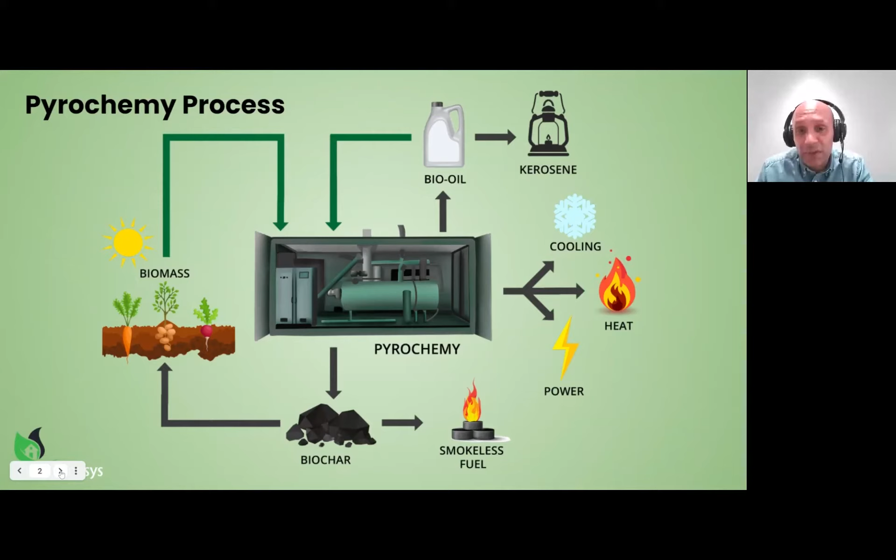Recommendations that came out of the LCA were that we need to develop a sustainability protocol. And this protocol would really tackle 3 key things. Make sure that when we're using biomass, it avoids competition with local use. As I said, we don't want to be taking away materials that other people are already using for something else. So avoiding competition, ensuring the sustainability of that feedstock, and then also how we look at using batteries as a low environmental impact for power distribution.

Now, there was a lot of knowledge transfer from University of Surrey to our team, so that we've now developed additional capabilities in-house, thanks to the great work that was done. And that means, using the LCA data collection methodology, we've got a way that in future we can do LCAs ourselves. And that will help us produce accurate and appropriate LCAs, using the feedstock and the location data that we gather.

Now, the other important thing, as I mentioned earlier, and this is where June was going to talk a bit more, is about how we can look at integrating hydrogen production into our PyroChemy process. And that's really important when coming to upgrading the bio-oil. Okay, but you'll hear more about that later.

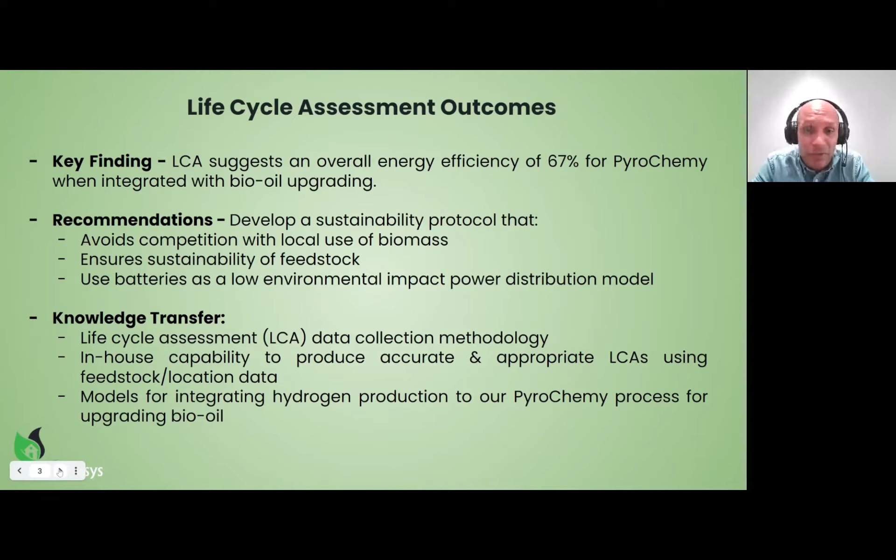So, geospatial analysis. We need to know where people are, and then we need to know how they're spread and distributed, and we need to know the proximity of settlements to major production of biomass. So that's really what we used geospatial analysis to do.

Just to tell you, 2 minutes left, Simon.

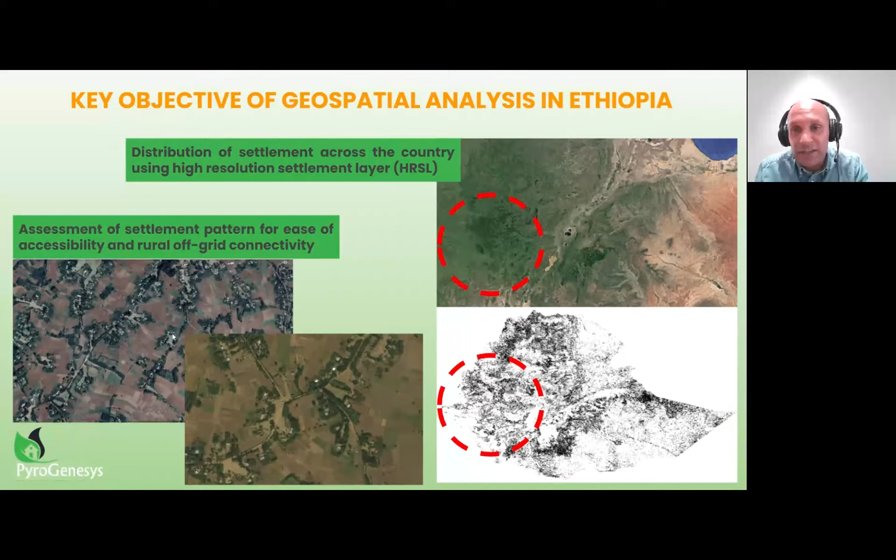Okay, so this is what happened when I was mentioning that we could then compare the settlement dispersion, which is a very different model to Nigeria. And then, of course, for the battery rental market, we needed to get an idea of how far these batteries can travel, and so how effective it is as a method for power distribution compared with a mini-grid model. And then of course, we wanted to know the size of the populations at those locations so that we could see, is it going to be commercially viable? If there's only 2,000 people, probably not. If there's 30,000 in a location that have electricity, probably a very good case.

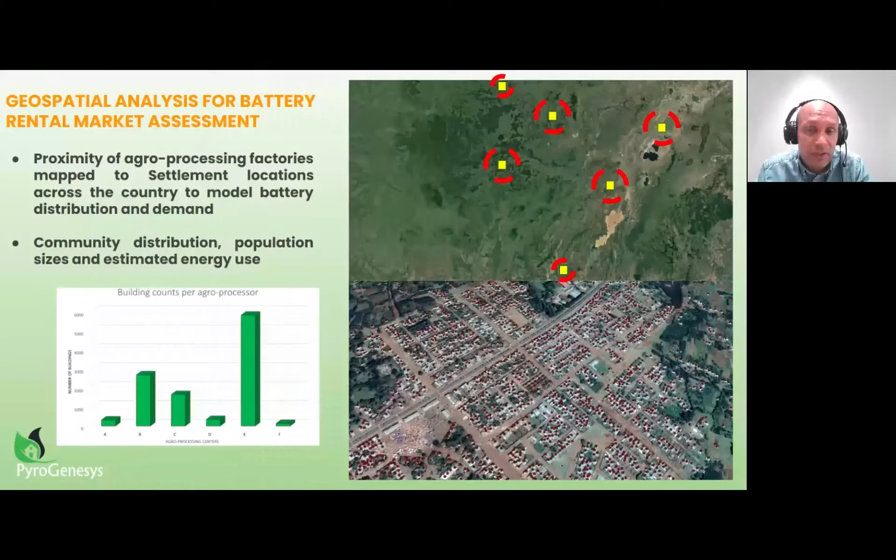Right. The other thing that, of course, we wanted to take into account is gender equality and social inclusion. Now, promoting technical training and understanding how women engage with our model is very important, especially when it comes to looking at how we're going to recruit, because we're going to do a lot of local recruitment. And we did some work that informed the recruitment process as well.

And, sorry, I'm trying to make sure.

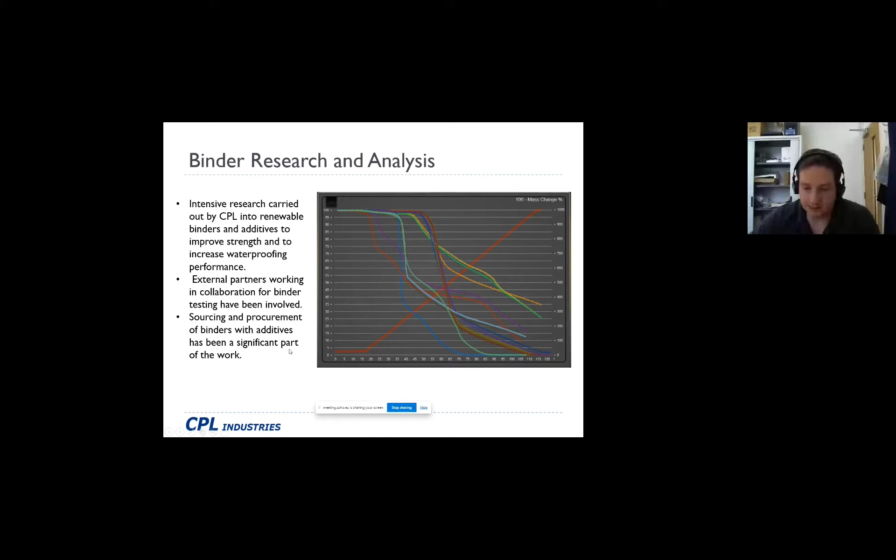One of the reasons for that is, in an industrial market, they want the briquette to remain a briquette right up until around 1,000 degrees for their specific application. We've also been taking a lot of time procuring these binders and additives, and that has actually taken up a significant amount of the project time.

So if we go to the lab scale testing, this is the hand press trials. Here you can see some examples of what we've done. So we've taken 50% biomass, in this case you can see olive, pistachio and macadamia, and mixed it with a 50% R&D blend, which is different types of coals. This can be petcoke, anthracite, and a specific additive in this case as well.

You can see how the additive has increased all the biomass's crush strengths in the briquettes, a good about 20 to 30% on the olive and pistachio, a little bit less on the macadamia, but it still shows an improvement. The control is just molasses. So the control also is not biomass, there's no biomass in that, it's all coal.

And the trouble with biomass is when you're forming a briquette, it's much more difficult to form the briquette compared to when you're just using coal. So that's why we've been searching high and low for other binders that can increase the strength of all the different shapes and sizes of briquettes we actually make.

So once we've done the hand press trials, we then move on to a pilot scale roll press machine. I'll just move on to the next slide actually. I'll go back to the Pyrogenesys binder, but on this one we use a large roll press which can take between 50 and 100 kilograms of material, whereas the hand press uses around 1 kilogram of material, so it's quite a big upscale.

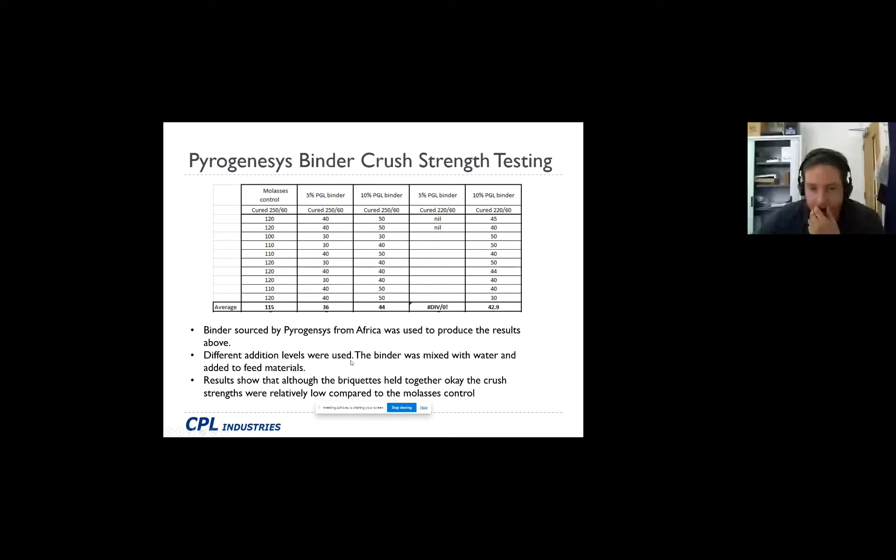So this binder was mixed with water, and you can see, unfortunately, in this case, the crush strengths were considerably lower than the molasses control. But we are still trying to find ways to improve that, and we could try different ratios of binder mixed in with this binder provided by Pyrogenesys.

So once the briquettes are produced, the final test we normally go through before emissions testing is the fire tests. So we load the fire as by the ASTM standard. We load the fire 3 times, and here we're looking for peak temperature or heat output, and also duration of the fire. So ideally, you want a very high temperature, but you want the fuel to last. You don't want to have to be reloading the fire every 10 minutes, for example.

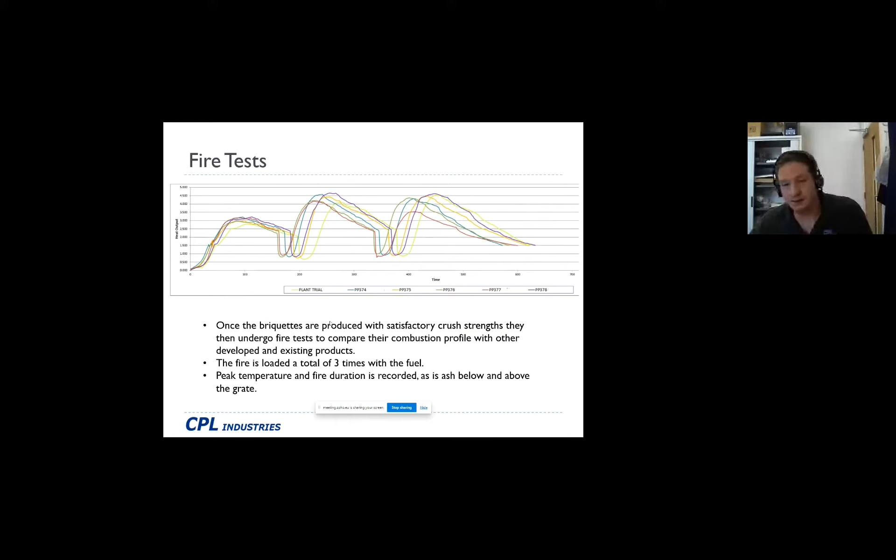So we normally compare our new product development against existing products that are in the market, whether that's our own or competitors. We're also looking here at what we call the SJ number, which is how much ash is remaining on top of the grate of the fire. That's also very important, because the customer doesn't want to see just a pile of ash and some unburnt carbon left on the grate, which is then a waste. So we look for a very low SJ number during the fires. And I think that covers the CPL work.

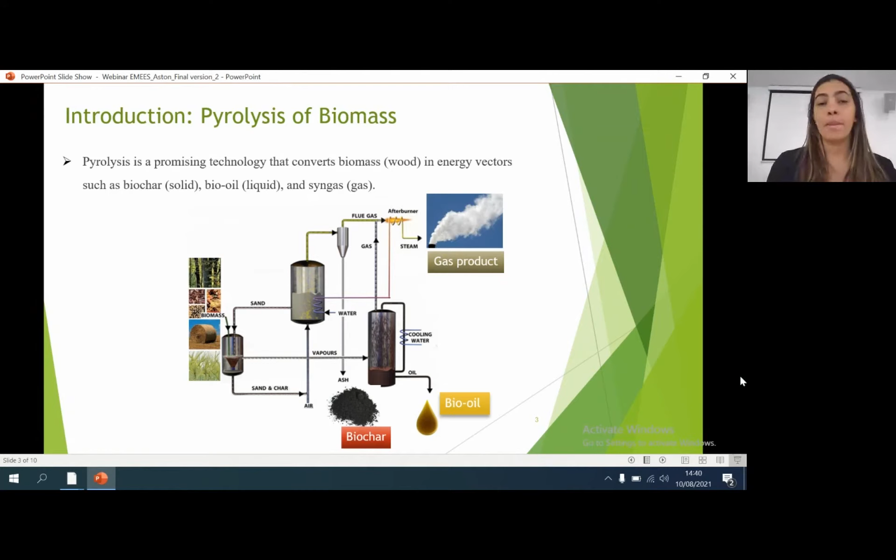The main focus in this presentation will be the bio-oil, and depending on the configuration and conditions of this pyrolysis process, it can be classified as fast pyrolysis, intermediate pyrolysis, slow pyrolysis, as well as gasification process.

Fast pyrolysis is performed at temperatures around 500 degrees Celsius with short residence time. The main product in this configuration is liquid, around 75% liquid in one phase.

In contrast, the intermediate pyrolysis process, carried out at temperatures around 500 degrees Celsius as well but with longer residence times, results in two phases of liquid products: an aqueous phase and an organic phase that we call bio-oil.

For other configurations, such as slow pyrolysis, it's possible to produce high yields of char, as for example in the slow pyrolysis torrefaction mode, or slow pyrolysis where we promote carbonisation, it's possible to have a very balanced yield of liquid, solid, and gas. In the gasification process, the main product is gas.

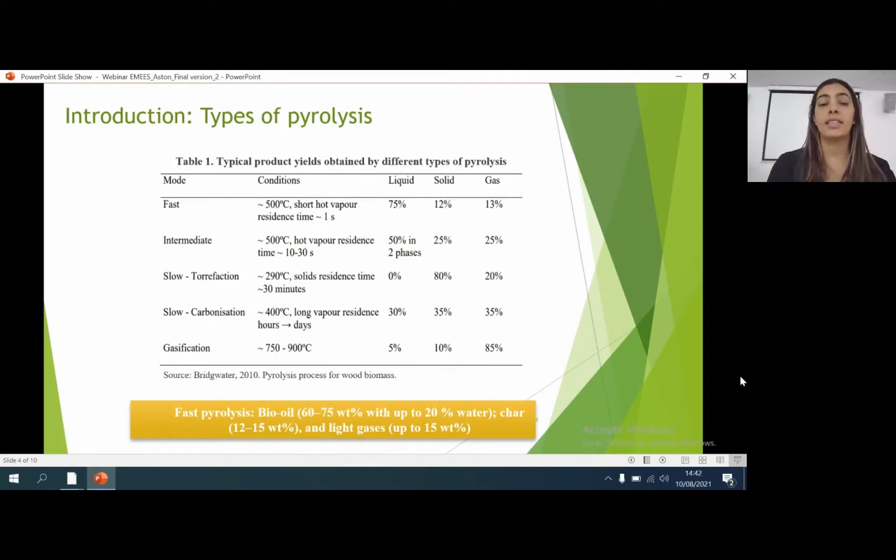From this table, clearly the best option to produce bio-oil is the fast pyrolysis process, which gives a yield of bio-oil around 60% to 75%, with up to 20% water in one phase only, and less char formation and less gas formation as well.

These oxygenated compounds result in several properties that make the bio-oil present poor combustion performance. For example, the bio-oil presents high viscosity, and the presence of carboxylic acids results in a bio-oil with high acidity and corrosiveness as well.

Due to the high oxygenated content, the bio-oil presents a low heating value compared with gasoline, for example. It also shows low volatility and low thermal stability, which makes the bio-oil tend to polymerize during long periods of storage.

Furthermore, bio-oil is immiscible with fossil fuels, and because of all these characteristics and properties, the bio-oil shows poor combustion performance. That's why an upgrading process is needed before it can be used as a biofuel with suitable combustion properties.

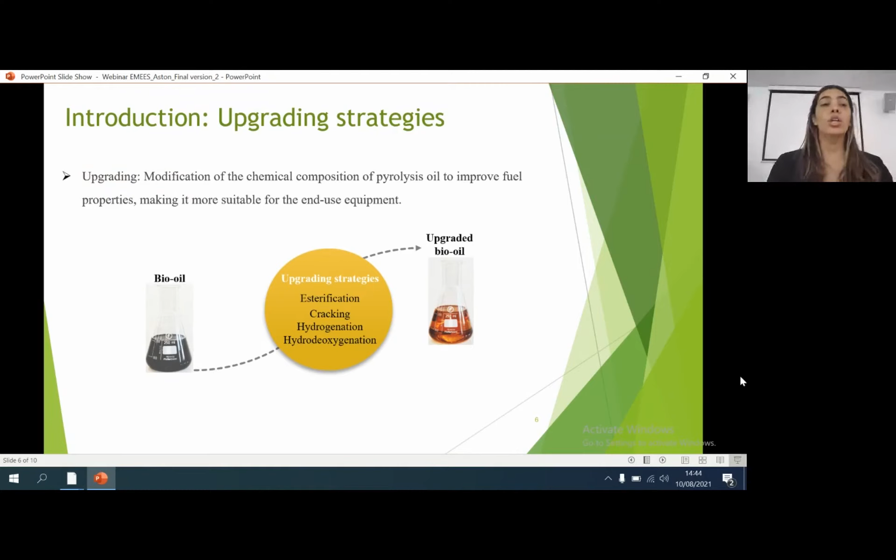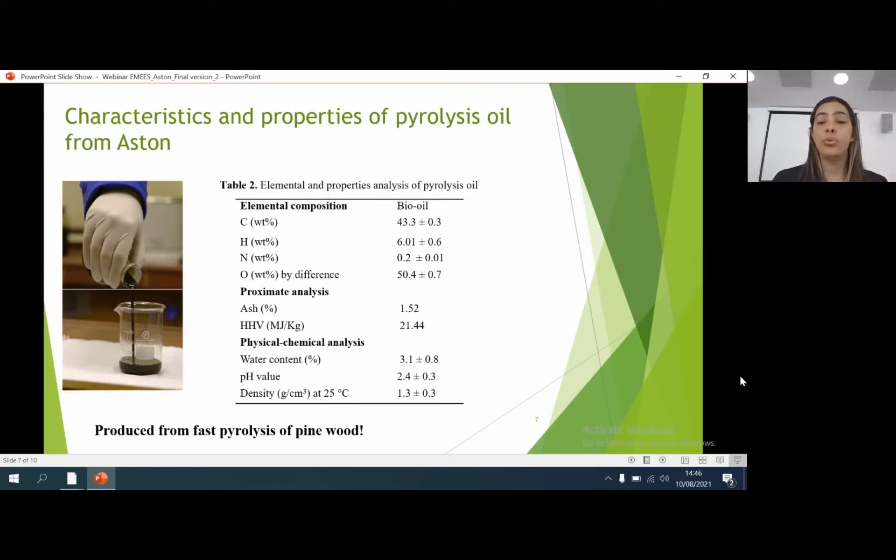So as you can see, this bio-oil presents a low heating value, around 21 megajoules per kilo, and also a low water content. The low water content is quite important because water can deactivate the catalyst during the upgrading process and also decrease the biofuel yield. So as you can see, the properties of this bio-oil imply several characteristics that give it a poor combustion performance, and that's why we need to upgrade this bio-oil.

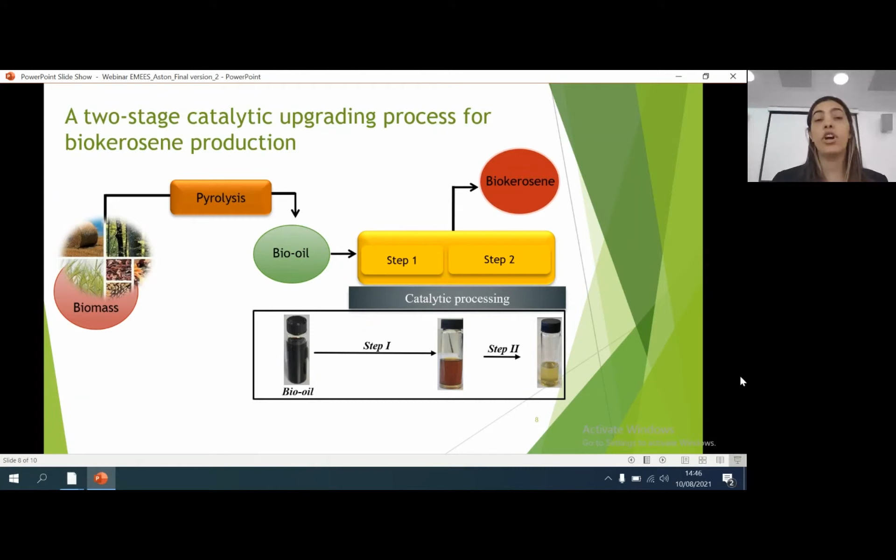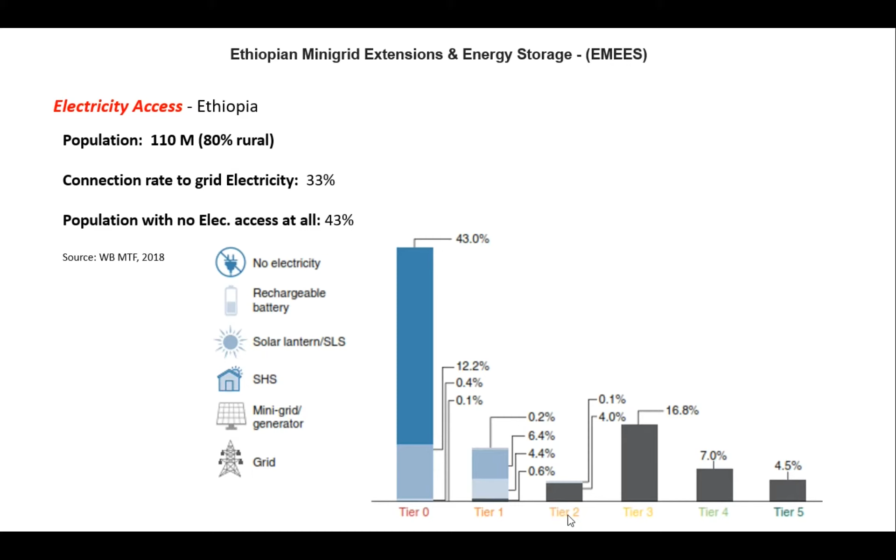Solar irradiance, we are closer to the equator, and we sometimes boast of having 13 months of sunshine, and the 13th month is only 5 days though. So the average irradiance level is 5.5 kilowatt hours per meter squared, and we also have good wind resource.

But when you see the biomass resource, particularly agricultural waste, we do have really quite abundant resources, though we are not using them very efficiently. It's only less than half of that we currently use, and those that we are using, we use traditional conversion technologies like cook stoves, the efficiency of which is very, very low.

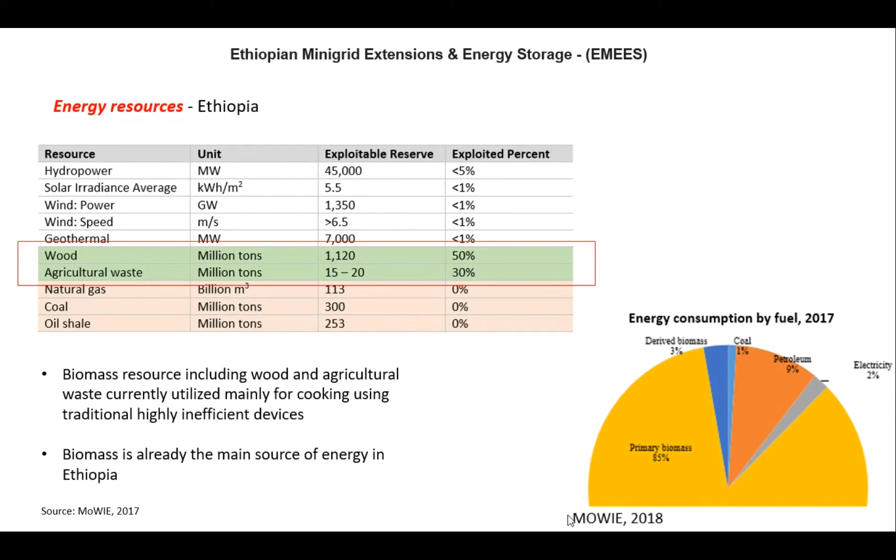So the pyrolysis technology would actually help us use it for power and heat at higher values. So in the case study, this is the area where we have our mini grids. Basically, our mini grids are powered by wind and solar hybrid, and they're battery based as well. This area is located in the central highlands of Ethiopia.

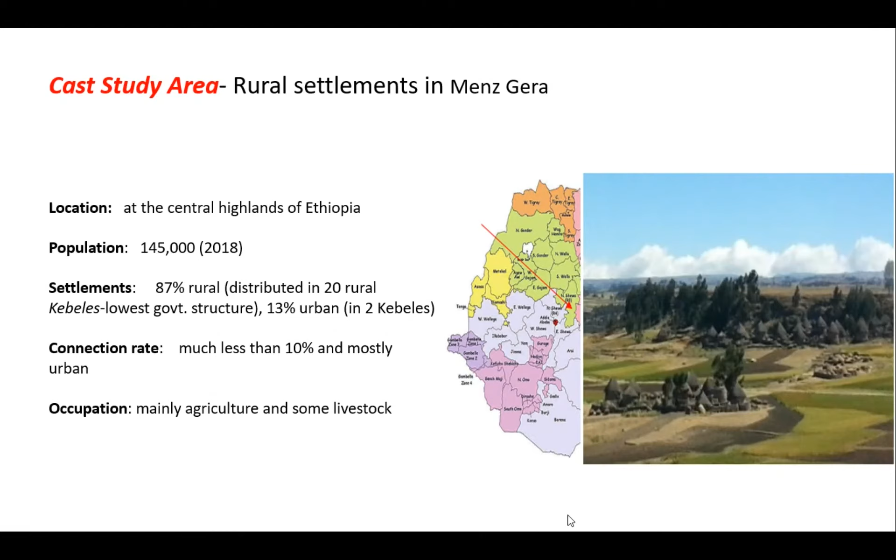Or in some areas, for example, the village that we electrified, they don't have any connection at all, except that a few of the households already adopted solar lanterns, and very few of them solar home systems. The main occupation in these areas is agriculture, and they also have some livestock. So this is a little bit of background on the villages that we have in mind when we think of mini grids, extension of mini grid services, and providing energy access.

You can see the kind of villages that we have there. And the picture at the bottom is the distribution line for our mini grid. So currently, as Simon initially stated, unlike Nigeria, we do have clustered but scattered households. So we have 6 mini grids, microgrids I would rather say, but the intention is, as the demand grows, we'll connect at least 4 of them together, because they are close to each other.

But at this moment, connecting them is rather not economically viable. But when the demand increases, then that's the plan that we have. Through our mini grids, we've already connected from 250 to 300 households, and they are actually enjoying the better lighting service and mobile phone charging.

But for productive use to come, a number of things need to work together. But there are already a few things on the ground. There is one diesel engine powered grain mill, and also a government-owned generator that drives the water pump, which is not currently functional. So we are trying to extend our services to these systems, but technology is also one thing, particularly when it comes to the grain mill, the technology that is appropriate for mini grids.

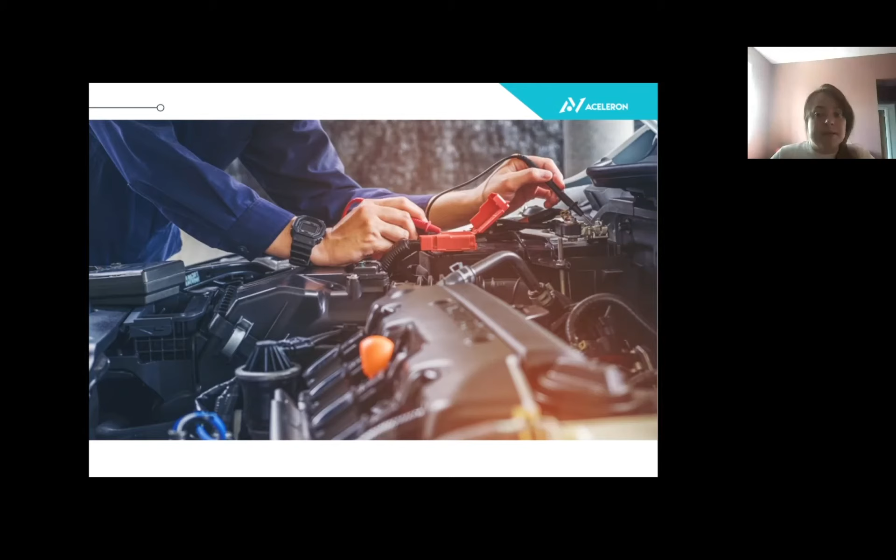Batteries are made up of hundreds of subcomponents, and typically it's just one or two of these that would have gone bad at the end of the battery's life. But because of how they are designed, we have to throw the entire thing away, which generates a lot of unnecessary waste of valuable assets, which obviously has a terrible environmental impact.

And just to give you an idea of some of the numbers around this, by 2040, from electric vehicles alone, not considering all the other batteries that are going to be all over the world by this point, there is an expected 22 million cubic meters per year of waste from electric vehicle batteries. And to help you visualize that, there's a nice little infographic here. That waste per year would fill the Melbourne Cricket Ground 14 times.

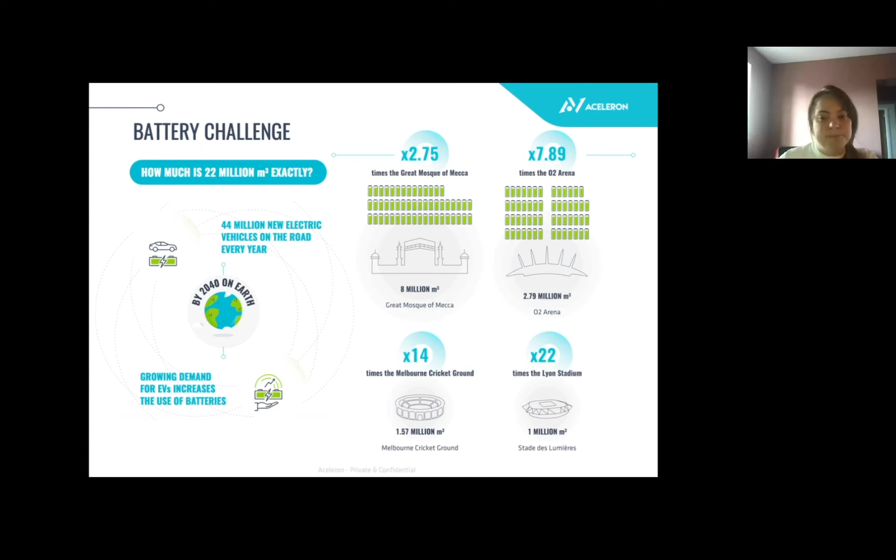So as you can see, this is really something we need to get a handle on now and ensure that we're doing something about this before it gets to be too much of a problem. So this is where Aceleron comes in. We have designed our batteries differently to typical lithium batteries.

In the usual method of putting these batteries together, all the parts are put together using glues and welds as well. And it makes it impossible to service, really. So that's the need for throwing the entire thing away.

So our design uses a compression technology, which allows us to, if there is an issue with any of the parts inside, after however many years, open it up. Using our predictive maintenance and also testing of batteries afterwards as well, we can figure out which parts have something wrong, replace them, and then put that battery back out onto the field.

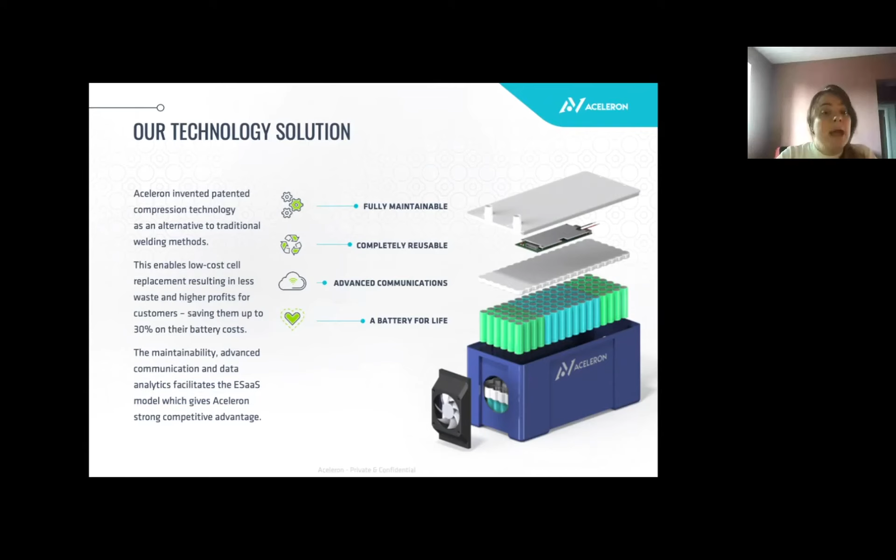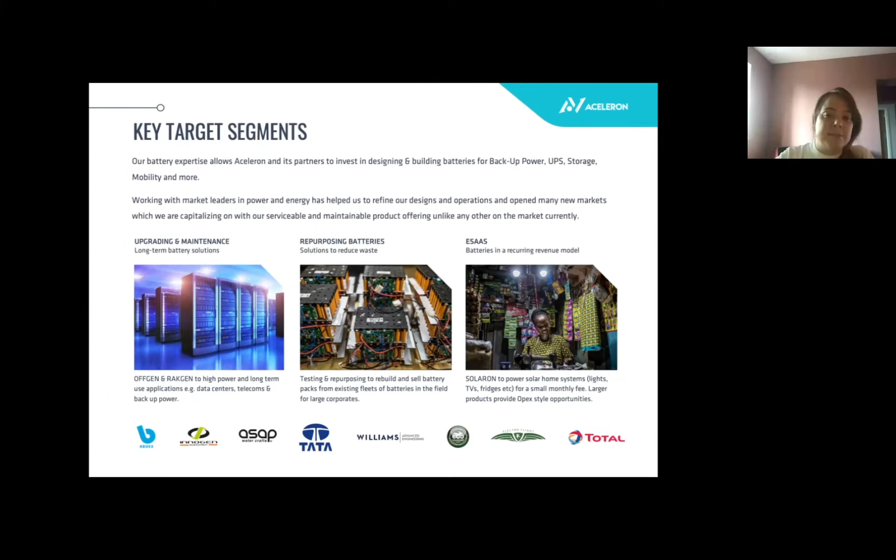So I would just like to tell you a few things about the different areas we currently work in. Some of the partners we've worked with currently and previously are down the bottom of the screen there. And really they all see the value in the serviceability and maintenance of the batteries, which is going to allow us to reduce that waste in the future.

So we work right up from home energy storage in places like the UK and the Caribbean. This year we're bringing out a large rack-mounted energy storage, which will allow us to facilitate commercial storage. And then we also go right down to much smaller devices, which just allow the combination of solar to be used in quite a lot of African homes, potentially for lighting or TV. Predominantly we work in Kenya and we have a facility there, and we're looking to expand into other countries, which this project has helped us do as well.

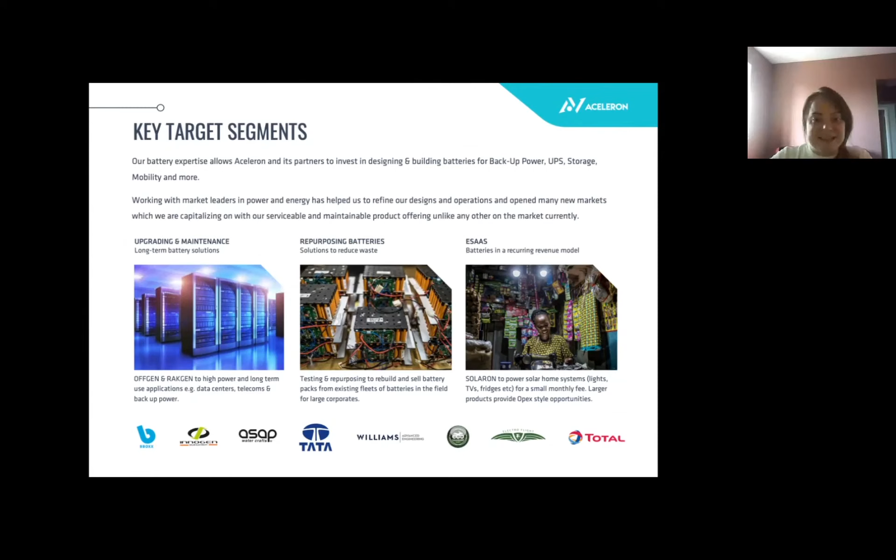So what we do in Kenya specifically is we work at the waste centre there, where we are able to collect and sort battery cells that have come from other technologies, which have those non-serviceable packs. If it wasn't for our technology, these would all just go to recycling instead. So we're able to take the Kenyan waste from across the country and repurpose it into batteries.

To do this, we disassemble the batteries. We then test the cells quite rigorously to ensure that they are safe to be reused. And then those cells are sorted, and using algorithms, we understand how those batteries can be best placed together into a battery pack to enable them to be put into use.

And so it's these batteries that we've been using and providing Halawi in Ethiopia to assess how we can expand his mini grid availability to more rural customers.

So I'll just say a very quick word about the differences between specifically our lithium batteries and lead acid, because typically in mini grids and in quite a lot of other applications, lead acid is sort of the incumbent technology. The way we have produced our lithium batteries is that they should be a similar voltage and capacity so that they can be used in similar scenarios. However, there are some great benefits to them.

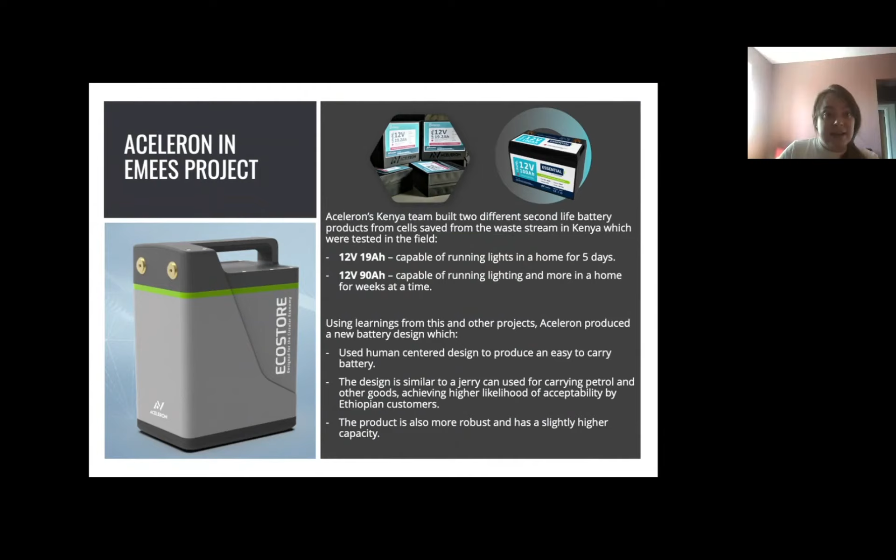So finally, we're going to go back to the presentation from the University of Surrey and Dr. Mary. Mary, are you going to try presenting it yourself? I'm going to share my screen, Bernie. You're going to share your screen, right. I think it's going to be easier to do it this way. Hold on a second. Sorry about the failed attempt last time. The system doesn't seem to like the PowerPoint presentation that I have, but we'll take it from Simon's computer screen. Okay, is that working now? Can everybody see that? Yes, we can.

Thanks. So, as I was saying, we have all heard in the last couple of days more than ever how the climate emergency is affecting the globe. And for a number of years now, biomass for bioenergies have been promoted as a means of reducing greenhouse gas emissions, reducing dependency on fossil fuel, but also to add value to agriculture and horticulture and forestry systems.

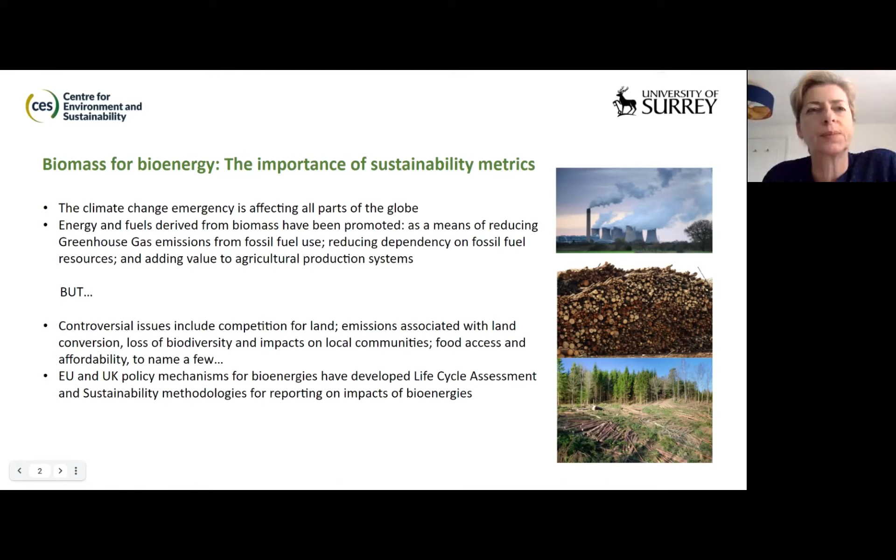Next slide, please. Sorry. Yeah, here we go.

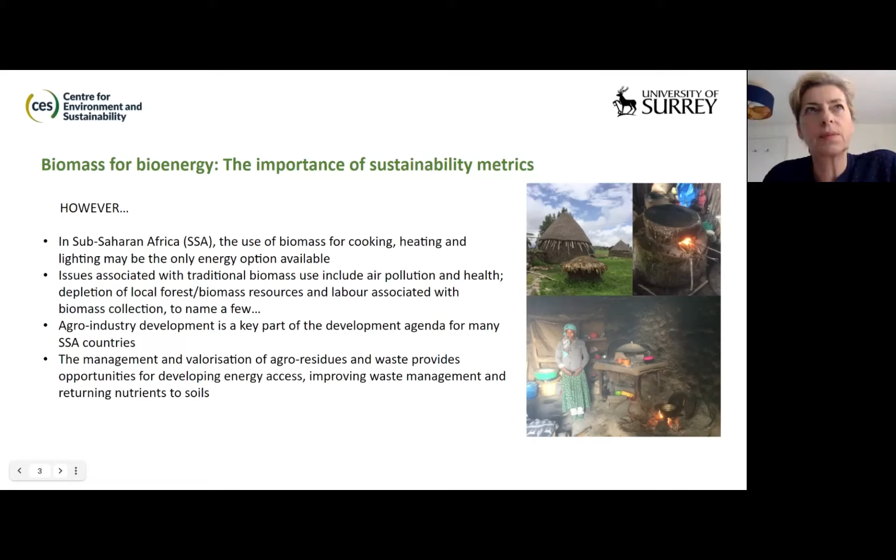Okay, thank you. So we've heard quite a lot about the EMEES proposal already, but just as a recap, it's a bioconversion technology which will provide 3 potential energy outcomes. And as part of the proposal, we've also looked at the mini-grid extension service offered by the Aceleron technology for repurposed batteries.

Some of this work relating to the biomass availability is related to a previous project which Ethio Resources and University of Surrey were involved in, a project called AgriSen, which looked at how the agricultural industry can be in some ways a sort of central point for energy provision. And as part of that, agro-processing residues and wastes were considered.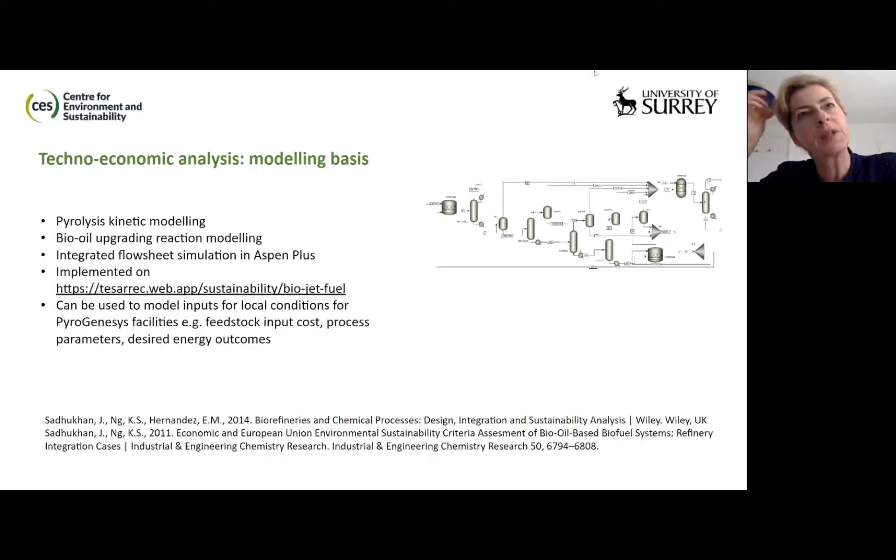Sorry, Simon, this is the last slide. Next slide, please. Okay.

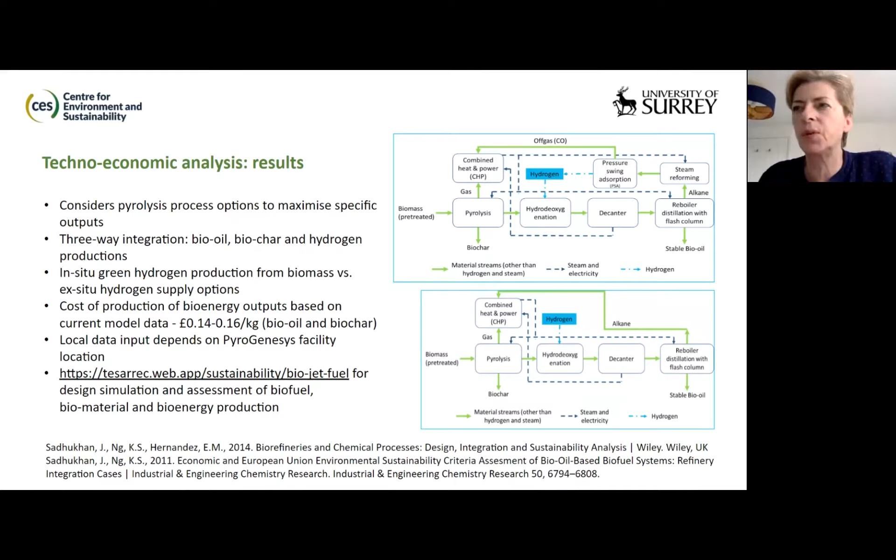My apologies for the technical issues. Given that we practiced this a couple of times, I'm really not quite sure what happened, but can I just say it's not my technical incompetency? Thanks, Mary. Yes, I think it was the webinar system. I won't be using it again myself. Thank you very much for that.